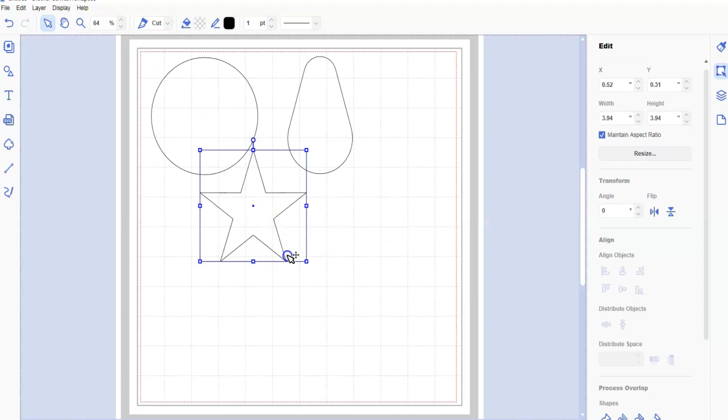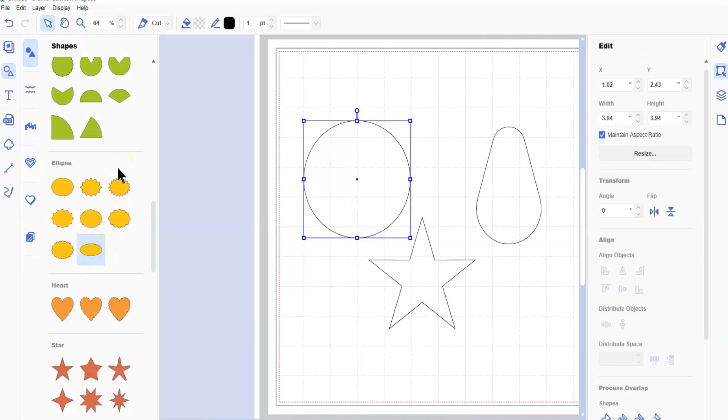Now these are three of maybe the basic shapes you need where you don't need to add much. If you wanted to add a piece on top so it looks like the top of the bauble, all you need is an ellipse, and there's a half circle. Actually, instead of the ellipse, I think that might be better. Okay, let's try that. So obviously you've got to size them right down. Let's get them out of the way.

So for a simple circle bauble, we'll centre it all afterwards. You would just need the rectangle with the very curved sides and half a circle on top. Do that a little bit bigger actually. And then centre it all down the middle and weld.

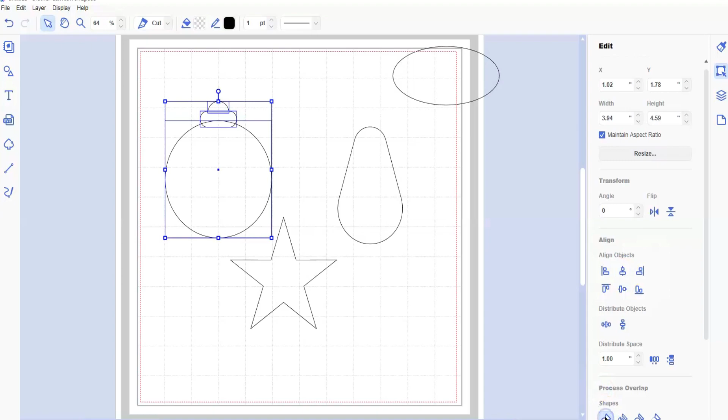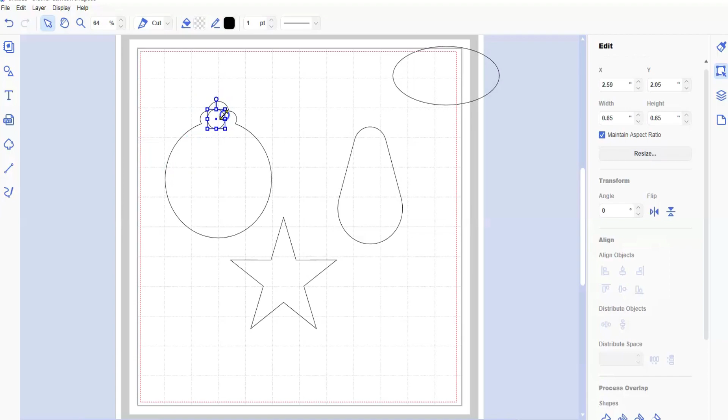And then all you would need is another circle, which I should have just duplicated. So we'll put it right small, and that is the one thing I always forget. So don't forget to put your circle, again, grab them both and align it down the middle so you know it's in the right place, and then that'll be your circle to hang your bauble.

So then you decide whether you want to make an actual hanging bauble for the tree or one to put on the card. If it's for the tree, I advise you to use board rather than just card, and a few layers. And if it's for the card, then you can just use normal card. The same goes for these shapes.

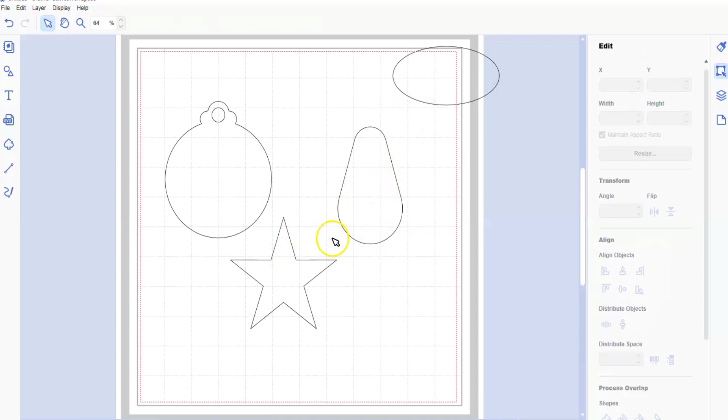The star, you could probably just get away with putting the circle, the cut out circle in there because it's a star. You don't really need a top if you don't want to do it.

So if you want to do one with an inside, for instance, then you start off by offsetting inwards 16, maybe 20, because you want it quite thick. Yeah, that's about right. And then what you do is grab them both and subtract, and that way you've now got a ring. There's nothing in the middle. It doesn't come up at all.

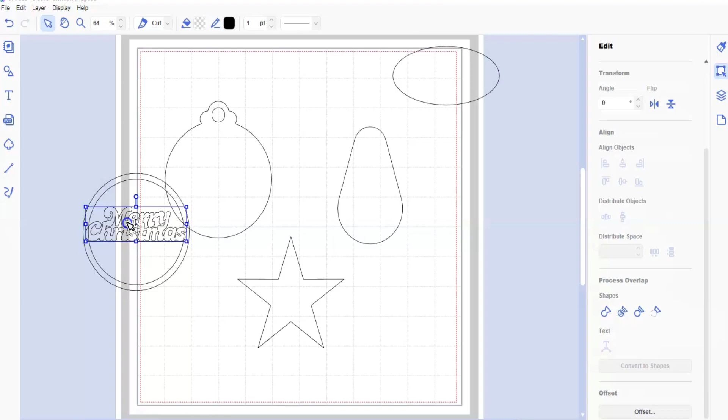You've got to click on the ring, and then you can add a word. What I'll do for now is just take a word from this set. Okay, let's just use the Merry Christmas for now. Size it so that it goes just into both sides. I'm going to turn it a little bit, I think. Oh, that doesn't really matter, does it? Let's get this out of the way.

That looks about right to me. You could centre them both so you know that it's in the middle. Centre, centre. And weld. There we go. And then you would add these bits on here with the circle so that it's on top. And so that's how you do one that's got words cut out.

You could leave it like this, put the Merry Christmas so that all that's out of it is the words. But yeah, that's how you do basic ones. But what I wanted to do was show you a few more fancy ones.

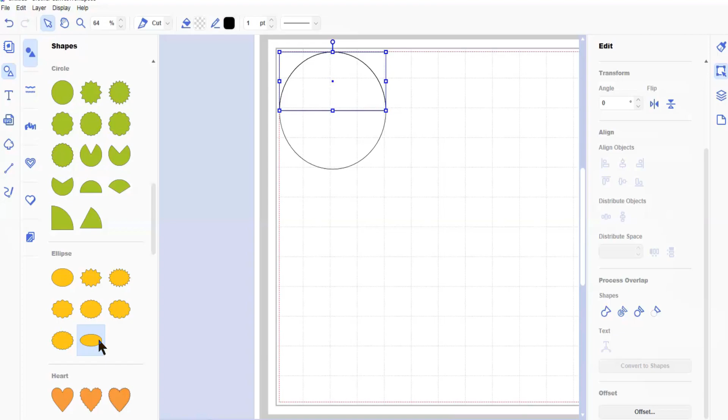So the first one I want to show you, I need a circle, I need a half circle, I need an ellipse, and I need two of them. Now this one seems to be a favourite at the minute, which is why I chose it. It's going to be easier to just duplicate so we know they're the same size.

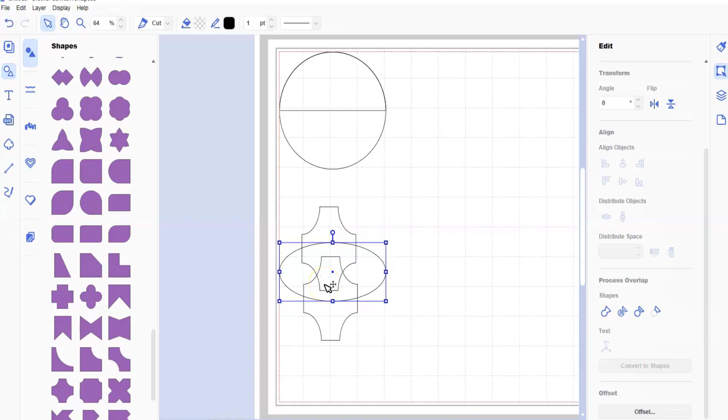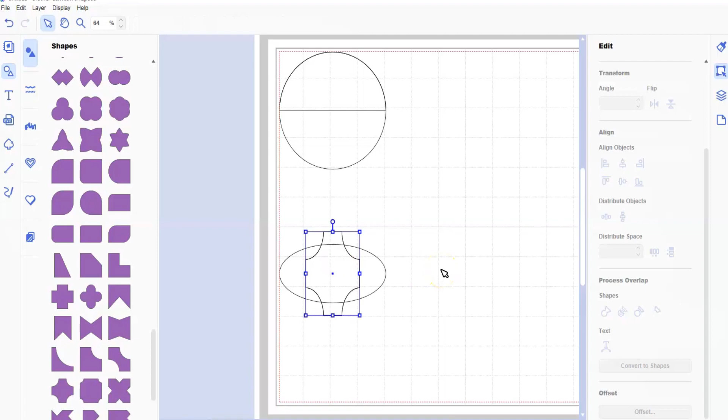So these shapes are often sort of left and people don't use them, but they are very good for things like this. So we get the ellipse, first of all we're going to centre it down the middle. That wasn't what I wanted to do. Okay, I'm going to group them and then add that on and then centre it so that they stay where they are. There we go, and then we just want to weld.

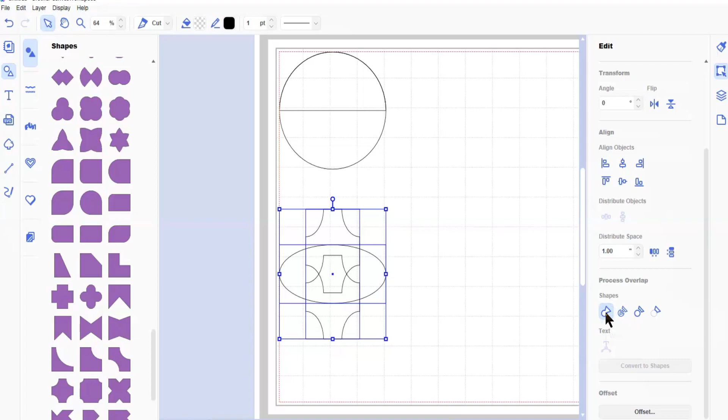This seems to be the most popular shape this year, so that's the easy way of doing that. That's what I forgot, the rounded rectangle. So we want this. Again, resize it a bit. And the half circle. For me, that seems to be the best way to make the bit that comes off. A bit smaller.

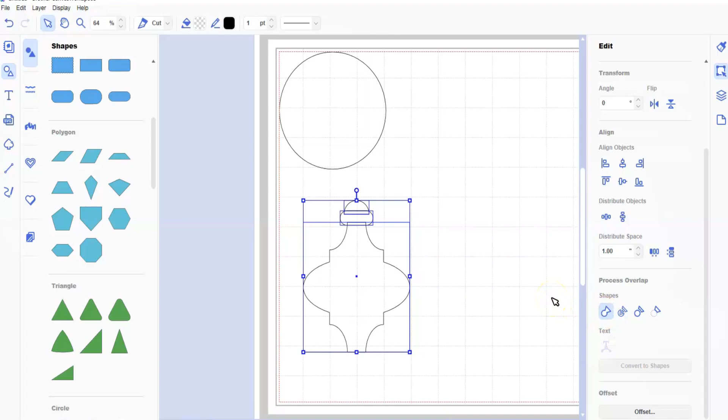Okay, and then we will centralise it again so we know it's perfectly in the middle, and weld. And then all you've got to do is attach your circle to hang it. Even if you're putting it on a card, you could feed a bit of ribbon through and hang it.

Centralise it. And it won't subtract because I have to make sure that the big bauble is at the back, and then it will subtract.

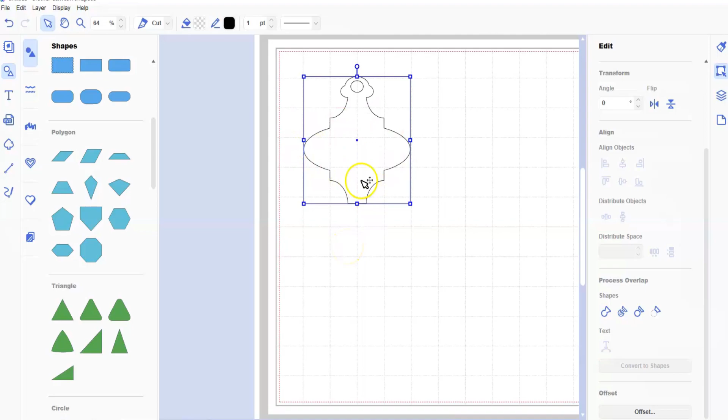So now we've got a hole there, and then it's up to you if you want to do a dangly bit at the bottom, leave it as it is, maybe even squash it up a bit, change the design, make this more circular than an ellipse. But that's one of the special baubles. Another one we've got - it's all about using the shapes, that's all it is.

We have a circle. Let's do it by size because then it will fit. 3.94, so we need that.

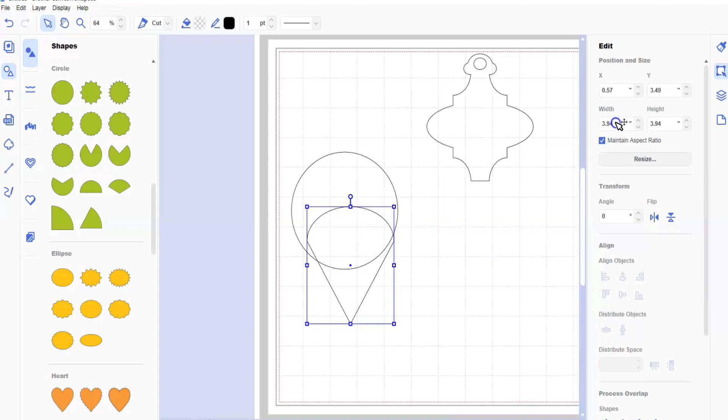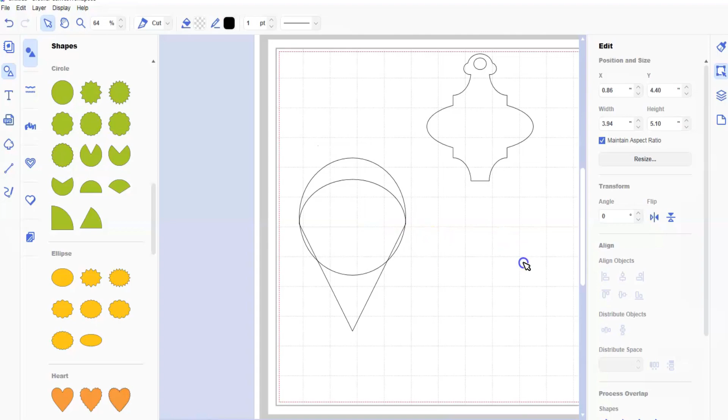Align it, and then move this up so that it fits. Go up a bit more, and then just pull that down a bit. And then if you weld, because we've already aligned, we can straighten these bits out if you wanted to.

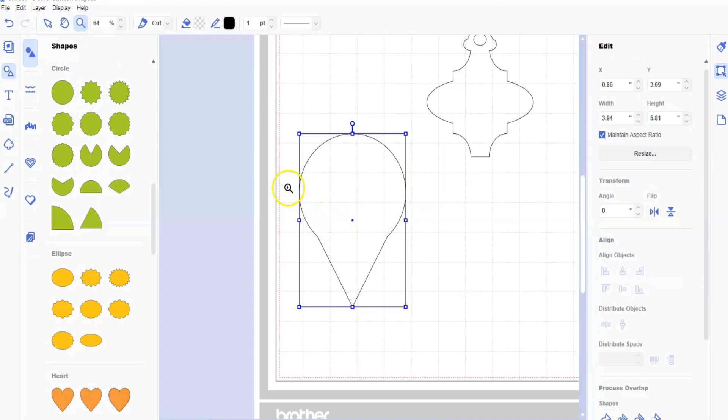If we got in close, click again, okay, so this is the one I want. I want to take that one away. There we go.

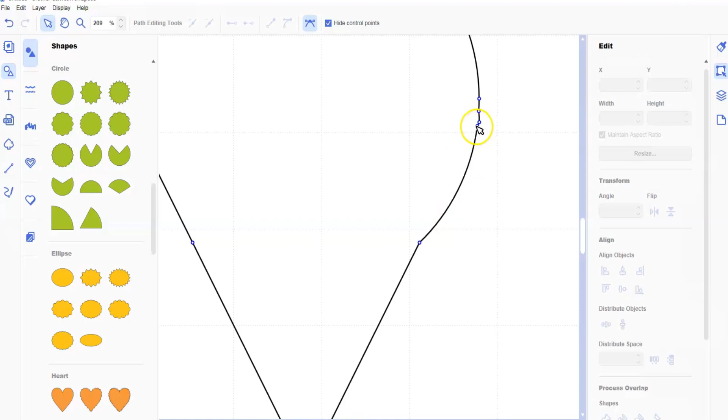So it's just, again, oh no, it'd be that one, because these go the other way round. Can't take that one away. If I took that one away, let's see. Oh yeah. We don't need that one. I don't know why that one's there.

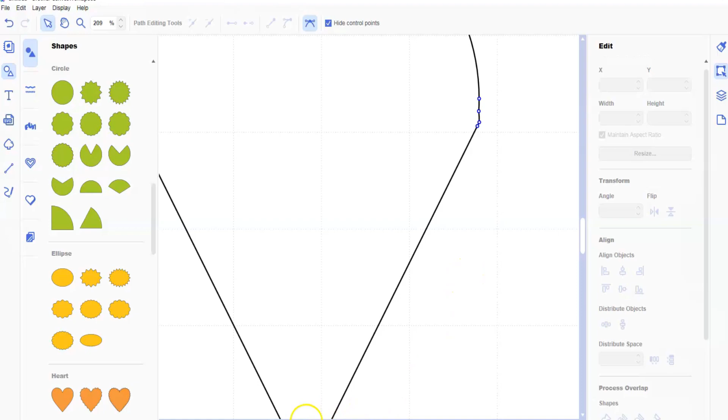So let's have a look. That's got an extra line in. There we go. And then you could squash it up a bit if you wanted, but there's a kind of semi-rounded with a point.

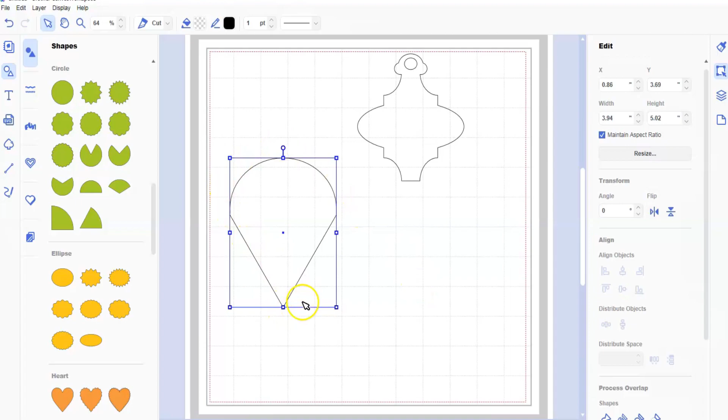An icicle would just be, I'm guessing, I would do it so that there's layers of that. So you layer, duplicate, and as you go down, you just make it a little bit smaller.

So let's change the top one to 4, so it's 4 width. So this one we will make it 3 3/4 inch, so 3.75. So we'll align it down the middle.

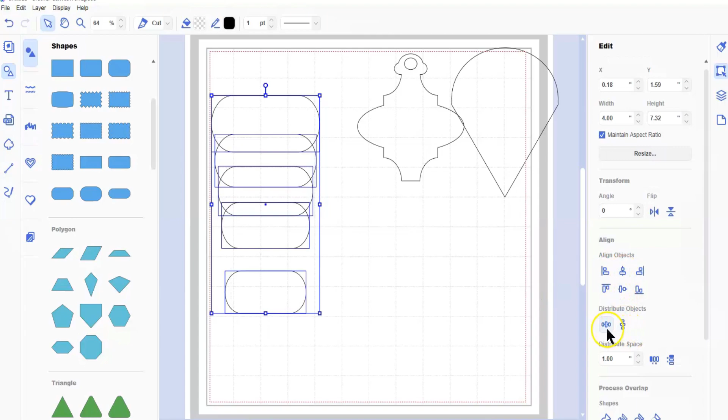I'm not sure whether to space it further apart actually. Yeah, so I'm going to undo that. I'm going to bring this down a little bit. Make sure it's still in the middle and then distribute evenly downwards and then weld. That should make a big difference.

That's better. We could go down in bigger sizes, to be fair. So you just keep going until you've got a small one at the bottom. And that is how you do an icicle drop.

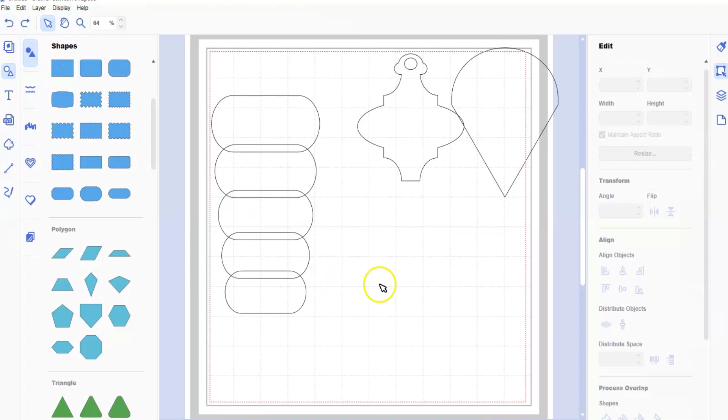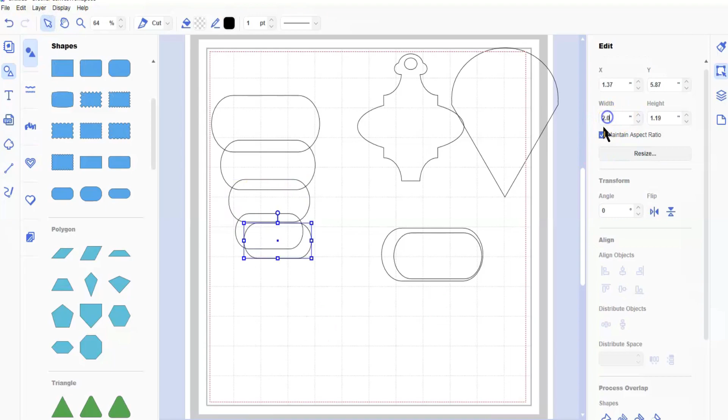Actually, let's take this one and this one. So if that one's 3, next one 250, because we're doing half. If we stop there, do that. Actually, I think I want it a bit further down.

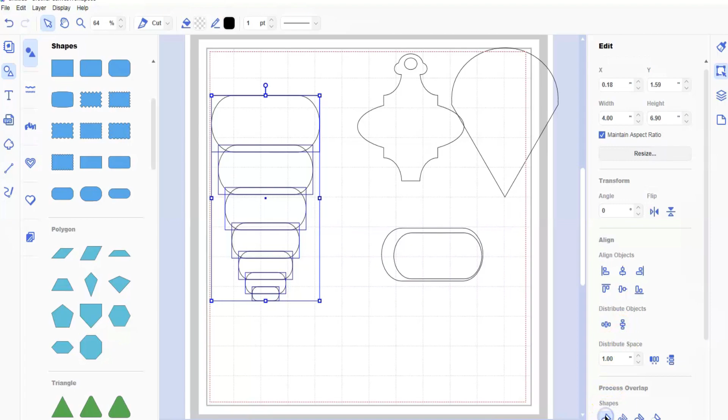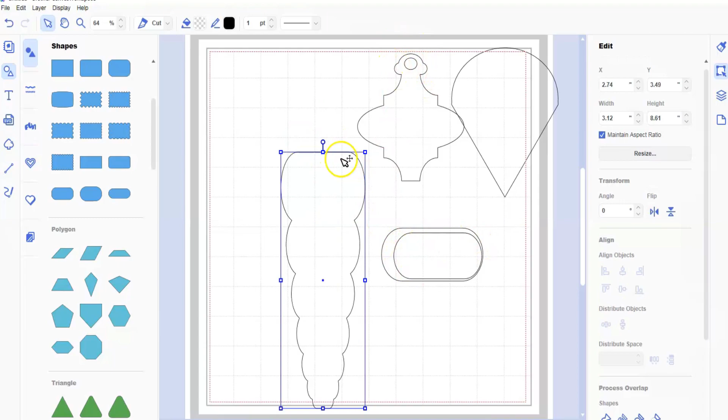So we're going to align it down the middle and then distribute evenly. Weld. Just a little bit better. And again, you add the thing and the half circle to that as well. So that's a few.

So the last one, I wanted to show you circle. Gonna need a few of them. So this is like having a fancy drop on the bottom of it.

And then we're just going to keep adding. Let's do a size for that. So at the moment it's 256. So if we do it to 250, it is then easier.

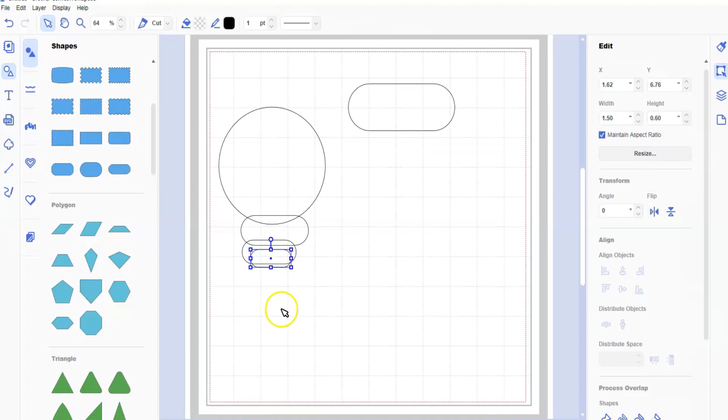Layer, duplicate. And we want this one at 2. Duplicate that. Now I'm just going to get them 3.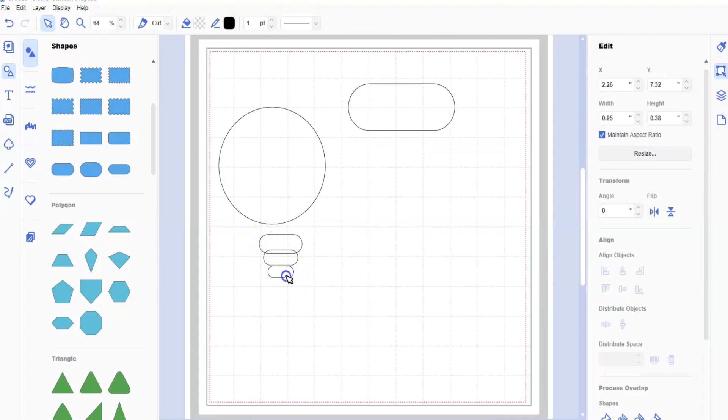If you shift and click the circle, that takes it away. First of all, I want it a lot smaller. Then I want them centrally aligned. That's a bit better. And weld.

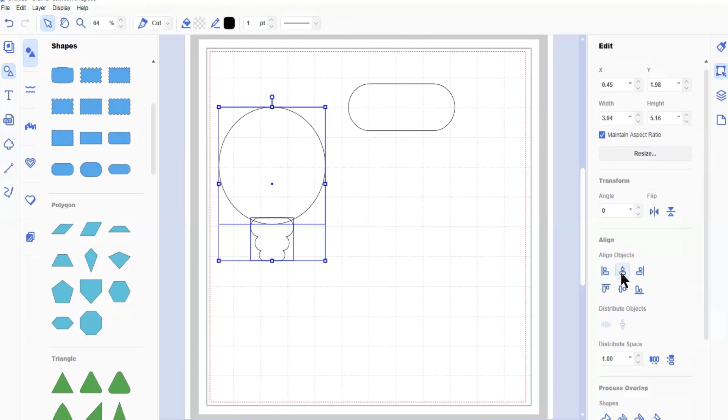And then we'll put it at the bottom of the circle. Align it again. Weld again. And then you can hang things from that as well if you like, jingle bells and things like that. And again, don't forget your top piece.

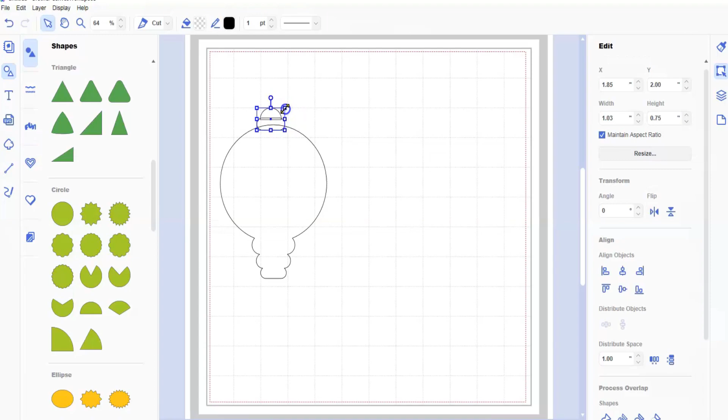I think they need to be a bit smaller. Realign them down the centre and weld. There you go, and then you add your circle for cutout.

So, I hope I've given you some ideas. If on any of them you are taking out the middle, you do that before you add all these bits.